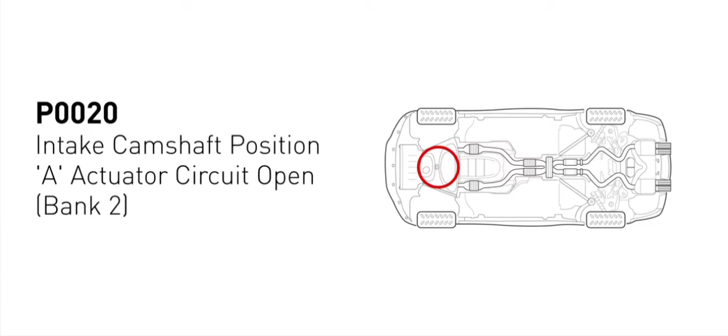Control valve has an open or short circuit. Here are two simple DIY methods you can try to solve this problem. Method A, oil change.

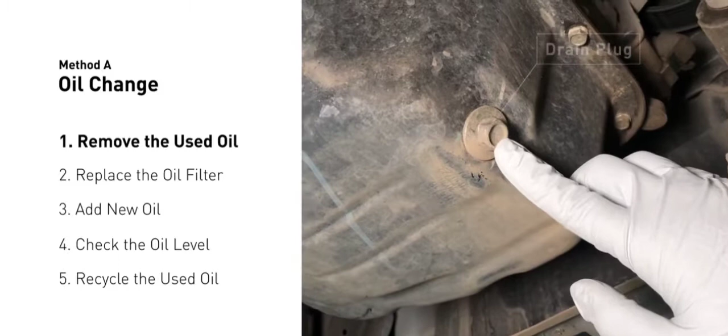Locate the oil drain plug on your vehicle and place an oil collection pan underneath it. Use the socket ratchet to remove the plug from the oil pan on your vehicle. Once the plug is removed, the oil should start flowing out into your collection pan. Once all the oil is drained, replace the drain plug and tighten it back on.

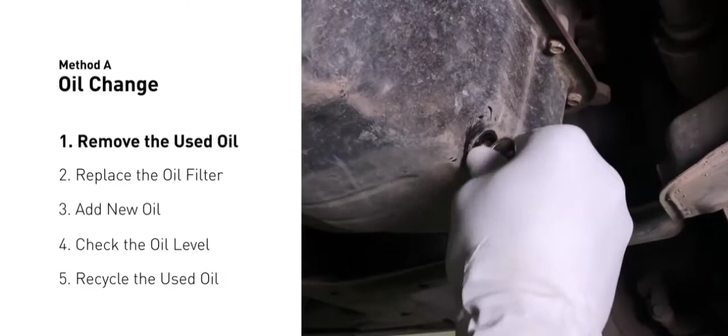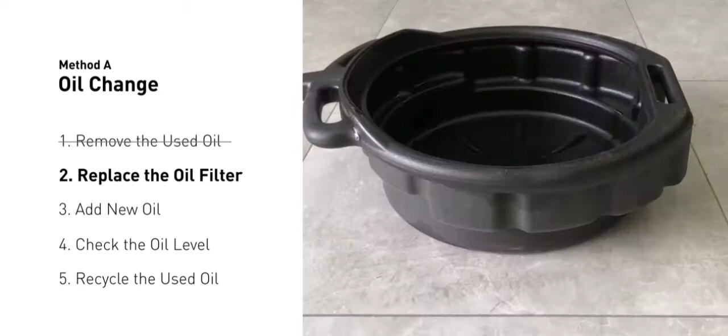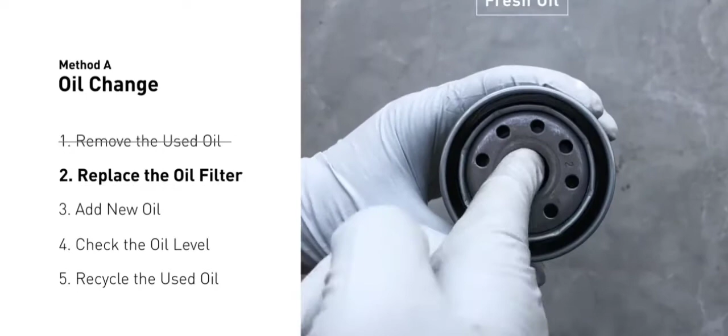The oil filter is usually located beside the oil pan, or under the hood of your vehicle near the engine. Place the collection pan under the filter. There would be oil in the filter itself that could be hot, so it is important that the oil goes into the collection pan. Spread a bit of fresh oil evenly on the new filter's gasket. Then install the new oil filter. Tighten the filter an additional 3/4 of a turn. Be sure not to over-tighten.

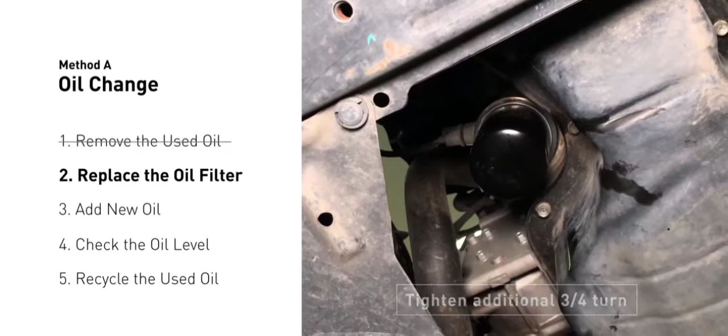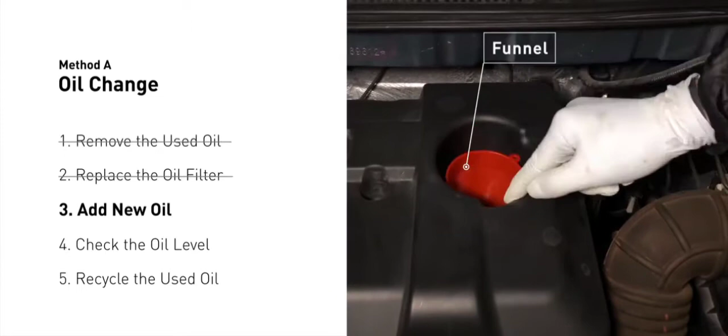To fill the vehicle with fresh oil, you should first locate your oil fill cap at the top of the engine. Clean the cap before removing it. Take the cap off and place the funnel into the opening. Add the amount of oil specified in your owner's manual, and then replace the cap.

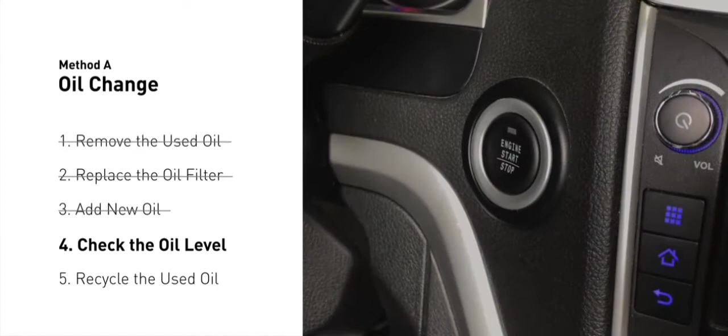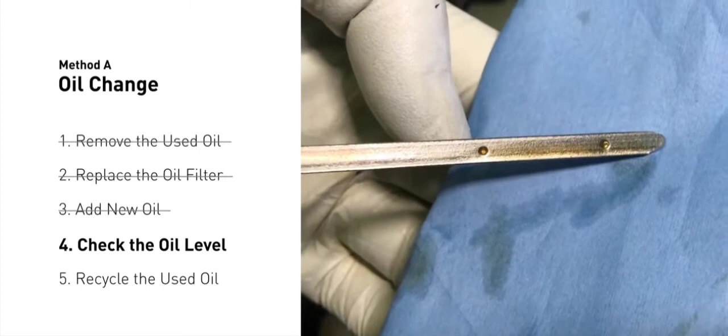After the oil change, start the engine and let it run for a minute to bring your oil pressure up, and recheck your oil level. To check oil levels, pull the dipstick out and clean it off. Replace the dipstick, and pull it out again. The oil should be near the top dot or fill line. If it is close to the lower dot, you'll need to add more oil. If your oil levels are good, replace the dipstick and shut the hood.

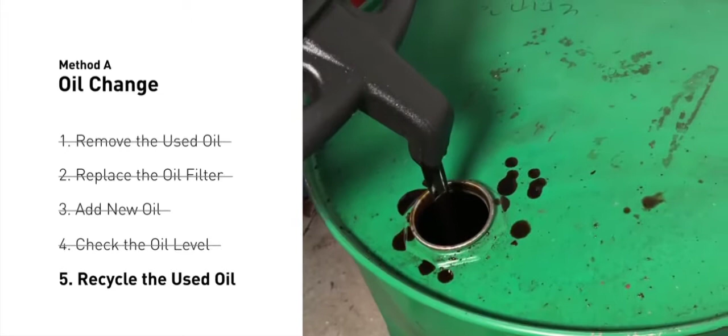Place the used oil from your collection pan into an airtight container with a screw-on cap. Make sure the oil is cool before transferring to the container. Used motor oil can be recycled at most auto stores or at recycling centers.

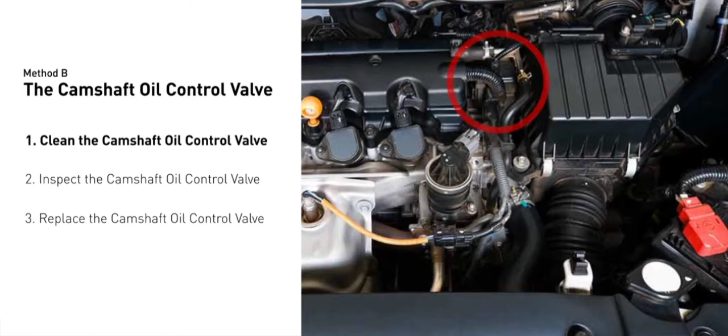Method B, the camshaft oil control valve. The camshaft oil control valves are usually located in cars that have engines with variable valve timing systems in them. First, carefully remove the camshaft oil control valve from the engine. Use a valve cleaner to clean the camshaft oil control valve.

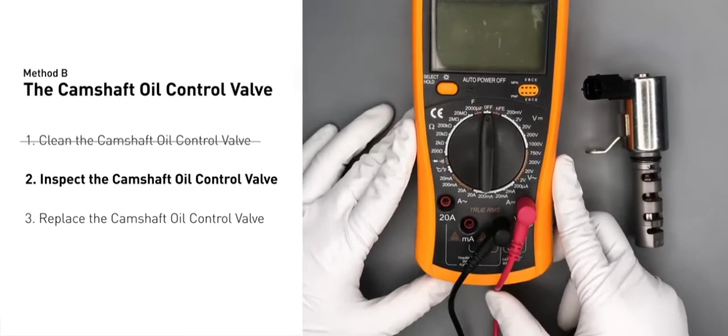Then, use a multimeter to perform a test on the camshaft oil control valve. In ambient temperature of 68 degrees Fahrenheit, the valve resistance is between 6.9 ohms to 7.9 ohms. If you do not get a reading, this indicates that the camshaft oil control valve is faulty and needs to be replaced. So here are two of the most practical solutions to fix the P0020 error code.